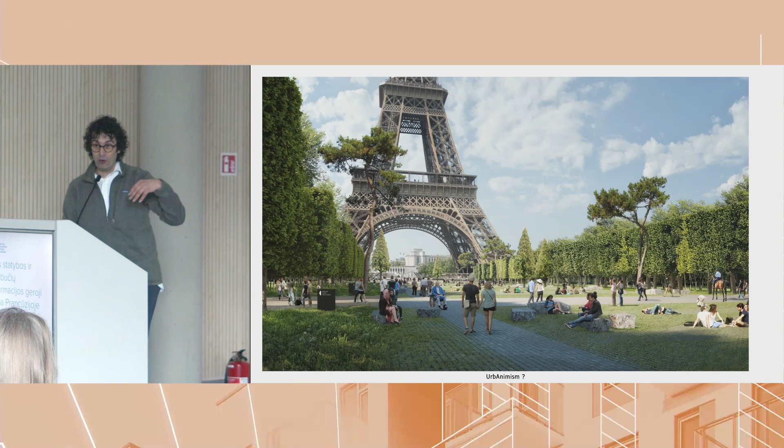We love planting trees. We tried in a competition for the surroundings of the Eiffel Tower, saying, okay, let's transform all this area into a huge forest with wolves, witches, and things like that, and we lost.

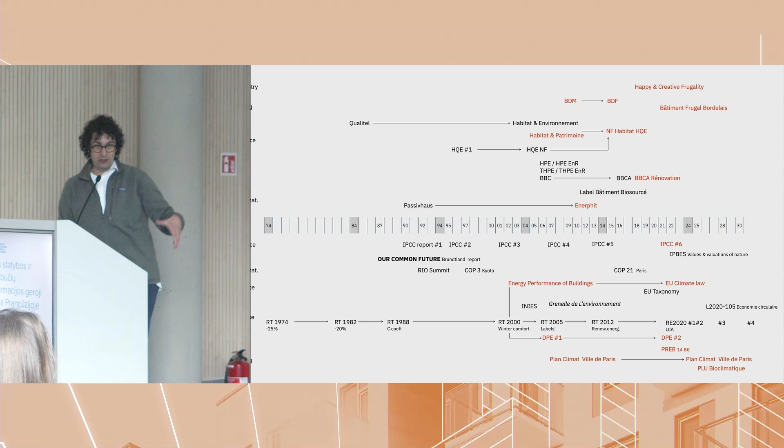Now this is the serious part about sustainability, because it all seems very intuitive and easy, but a lot of things are building up on an international, European, national level, even local level.

Basically, I've tried to summarize 50 years of the sustainability approach on buildings in France and Europe. On the bottom is all that is law, all the things that we have to do, whatever happens. On the top is all the things that are more holistic, that try to bring together different approaches to building. Because basically the law, you just have to apply it, otherwise you're outlaw.

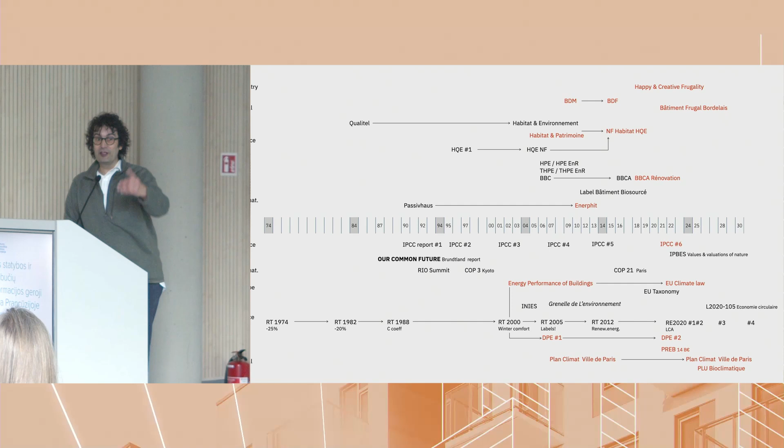The other approaches, which are referential labels and things like that, have this interesting thing that they are always evolving. They're always trying to catch up with new ideas. They have a faster cycle, but still they are always a bit complicated.

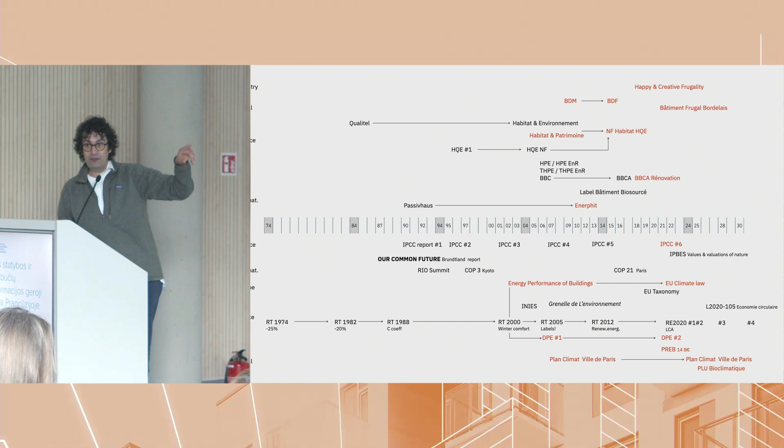What you see in red is all these laws and labels that have concerns regarding restoration of buildings. For a long time, you can see almost till like 20 years ago, it's really the moment when we start realizing that there is a huge issue about sustainability in renovation of existing buildings.

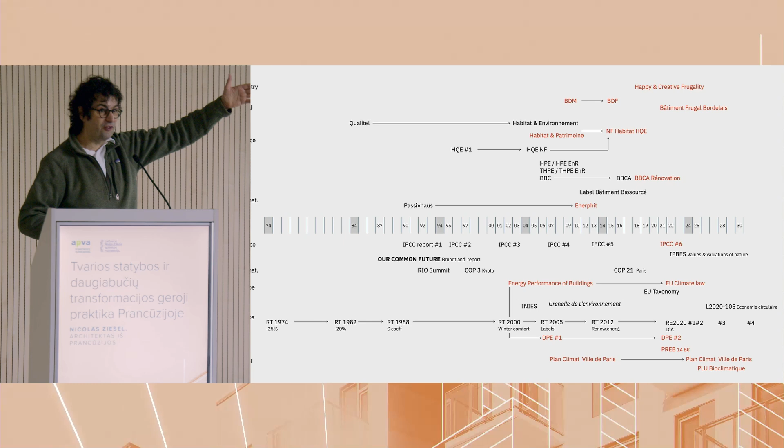I'm not going to detail everything in it, of course, lucky you. But still, it's very interesting to see all this map of things that are evolving, and to have this in mind, because sometimes as architects, people just say, okay, you're going to apply this new law, and you say, what the hell, we already have this one, we already have that, and we end up piling like 5 or 6 different systems together.

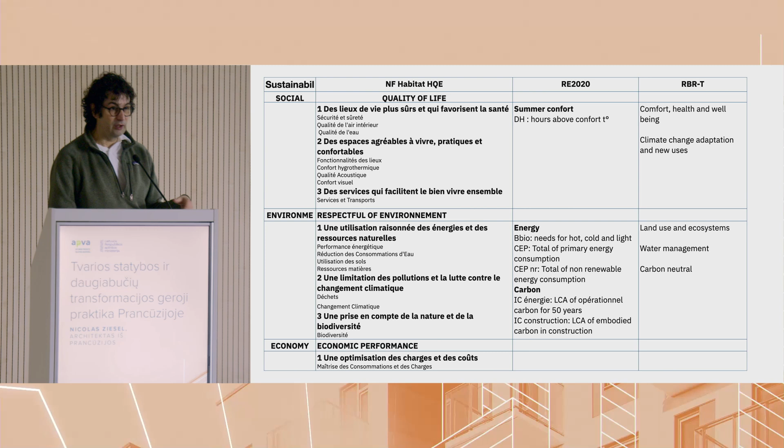Basically, it's super easy to understand, because everything goes back to the Brundtland report in 1987, which defined sustainability as being the intertwine between social, environment, and economy. And everything that you see, you can always break it down to these 3 aspects. So it's also an easy way to relate the different levels.

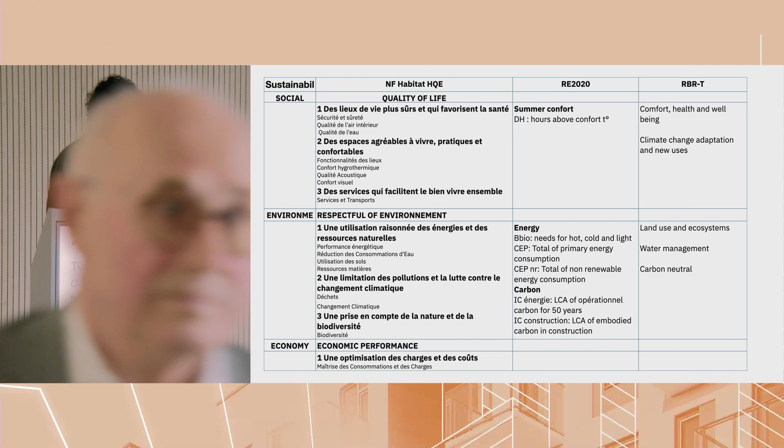The first column, NF Habitat HQE, is a holistic approach that is totally voluntary from owners and builders and things like that. Why do they do it? Because the law, as you can see on the right column, asks for less. Well, they do it because it's also a guarantee for future owners, regarding who make maybe a mortgage to the bank. If you respect this, you probably are going to have a much better housing than if you don't respect it. So this is sort of encouraged by finance in a way to do it.

And very easily it's broken into these three aspects. Then, since 2020, we have this new regulation in France on a construction code, building code that applies for the moment mainly to new buildings.

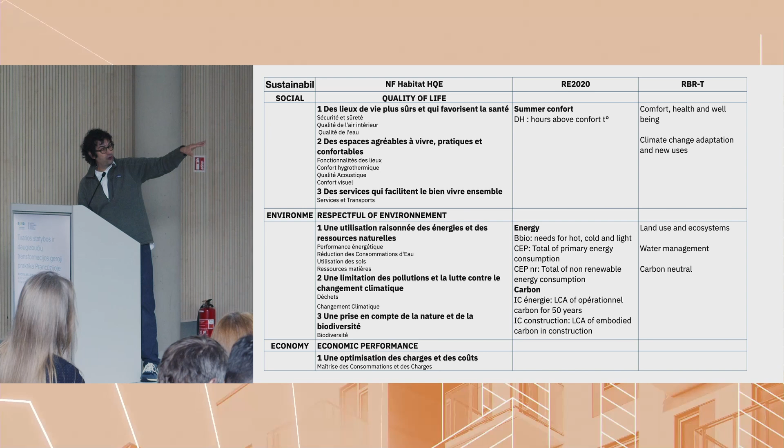But if you have an existing building and you just build like 10 more square meters, you have to apply it. The interesting thing is that usually all these rules talked only about energy and summer comfort, and now there's this carbon aspect that's really important. This is really a worldwide move, and I think Europe is pretty much forward in that.

Even though we all have national referentials, national ways of calculating the carbon footprint of materials and buildings, there is a sort of convergence of it. Just to give you an idea, in France we started listing the carbon footprint of materials like 20 years ago, and now I think 1/3 of the database worldwide comes from this French database.

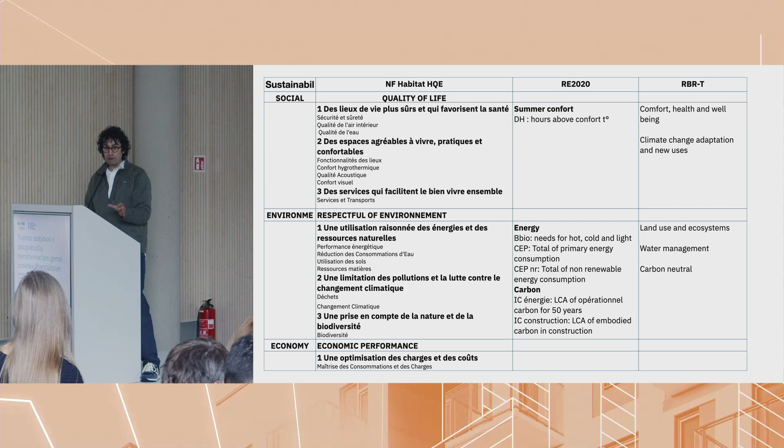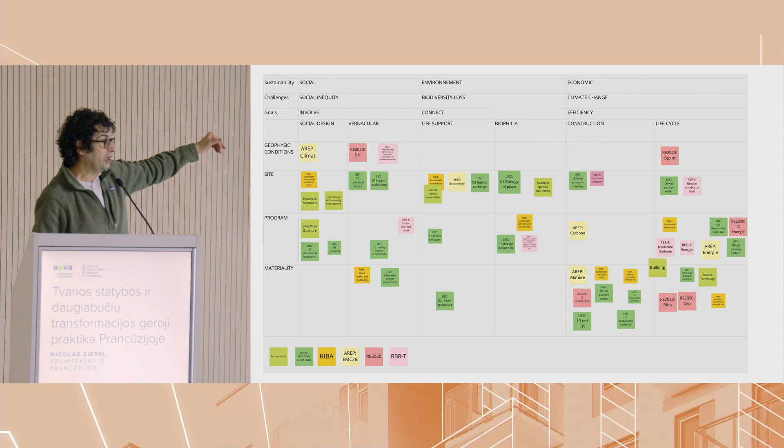It's not going to be so simple, as you're going to see. As an office, this is how we work, because trying to manage through all these things, we have made our own guide, which is to combine three aspects: social, environment, economic. Six sort of topics for a project regarding social design, life support, construction impact and life cycle impact, and how they apply at different levels of a project, from super large climate conditions to the materiality and sensitivity feeling of the buildings.

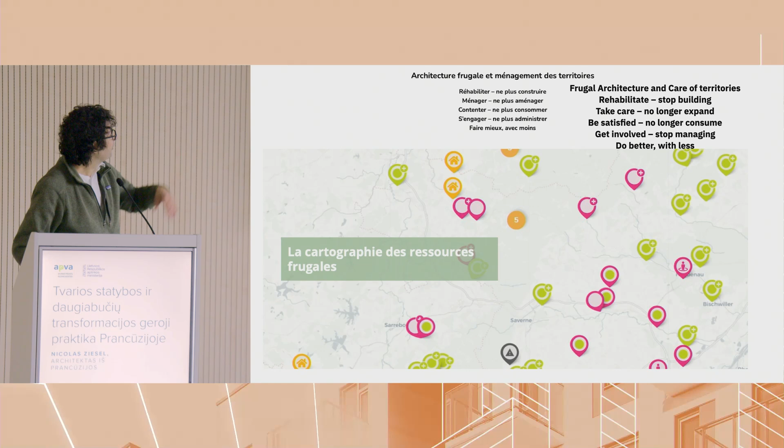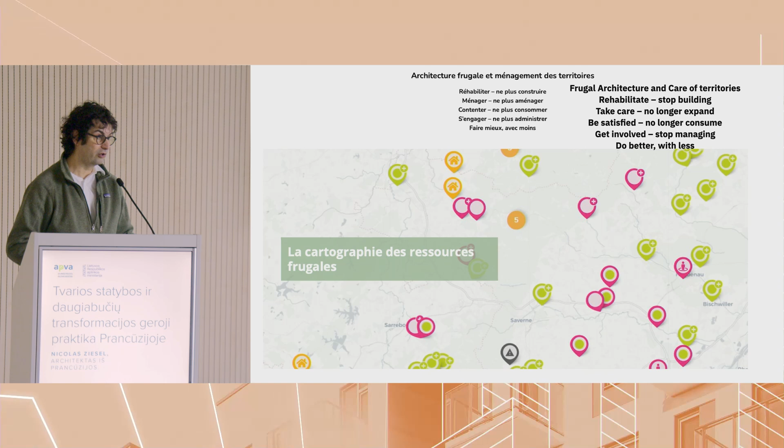Then there are people who are really fed up with all this complication, and who try to have super simple rules. There's this great initiative launched by French, Belgian, Spanish, Italian architects called frugal architecture. They have 4 or 5 sets of rules, each time in opposition to the business-as-usual way. It's a very interesting way of tackling things. It's also a network of people who exchange on practices, recipes you could say, and it's possible to launch a chapter here, nationally, citywide, or whatever.

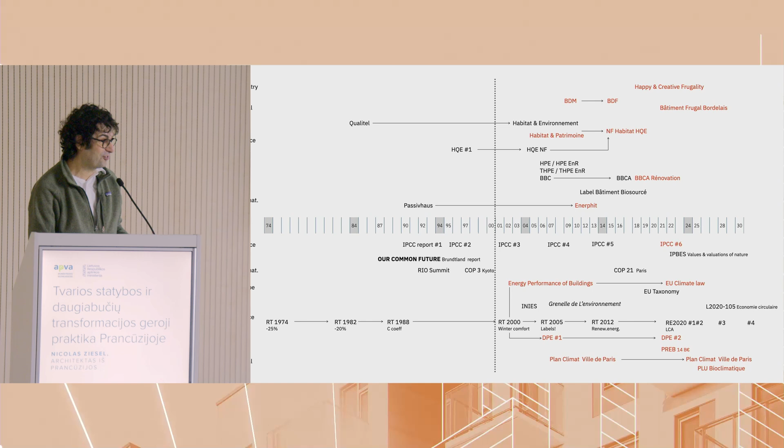Now I'm going to show a few projects, sort of a timeline. One of the first projects is the first project we made in wood. At the time, there wasn't much regulation and not much of a holistic approach. So basically it was a super small house, and you'd say, wow, a wood house, that's super ecologic, super sustainable.

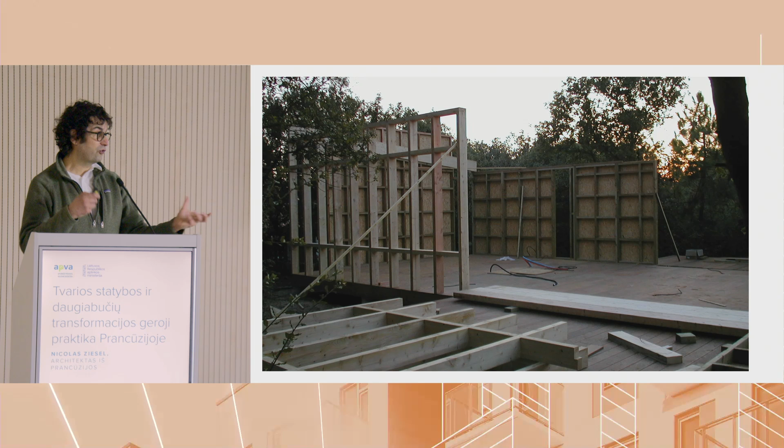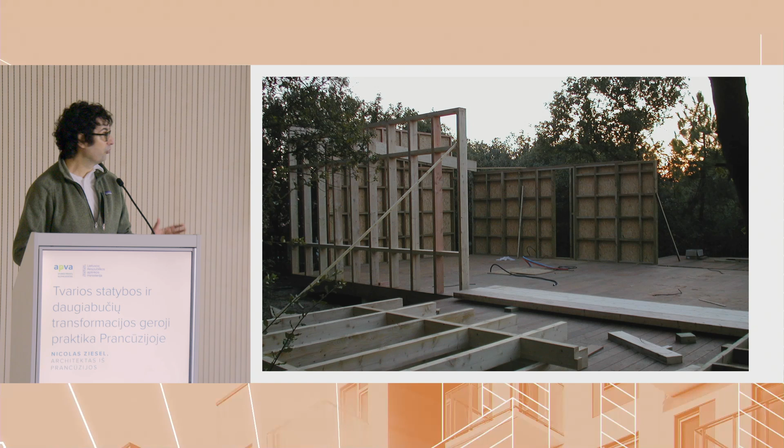A second project I'm going to talk about is a 100% wood structure in Paris, but it's also a project that was, let's say for us, the main retrofitting activity we had — working in the heritage areas of Paris. The difficulty is that since it's heritage, you have heritage architects who are always raising issues, which was actually a good thing for us on this project, because basically we were completely outlaw on the wood aspect. There was no code building on it, so we were really improvising, and there was no proof that what we were saying was real.

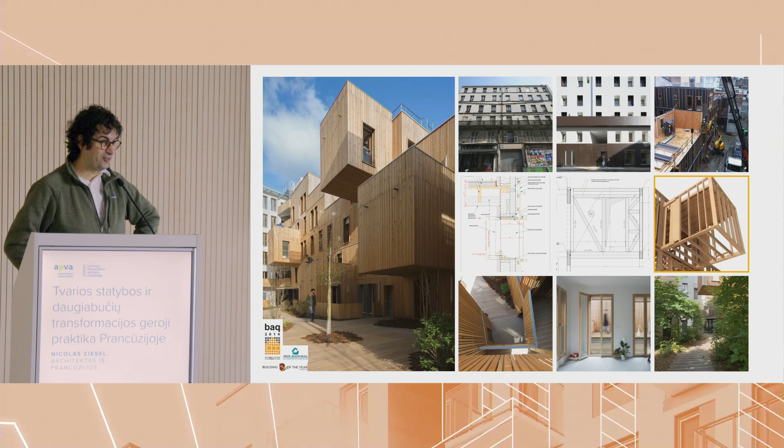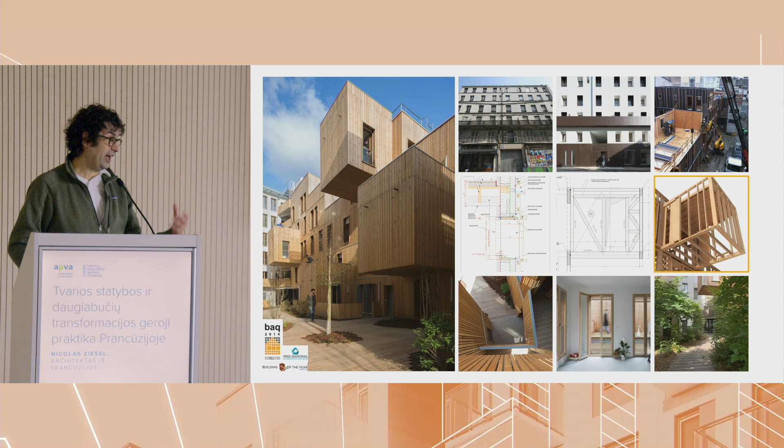This was really moving with this off-site production, because one of the interests is that since it's off-site, the building takes less time, and this applies also in renovation, so you have less trouble for all the people living in or around. In fact, the construction work was so silent that the neighbors complained, because there was only 1 day a week when there was noise, when they were delivering the panels. That was the 1 day when the street was blocked, but they couldn't understand it. If they had traditional construction work, they would have had a 7 days a week issue with noise and dust and things like that.

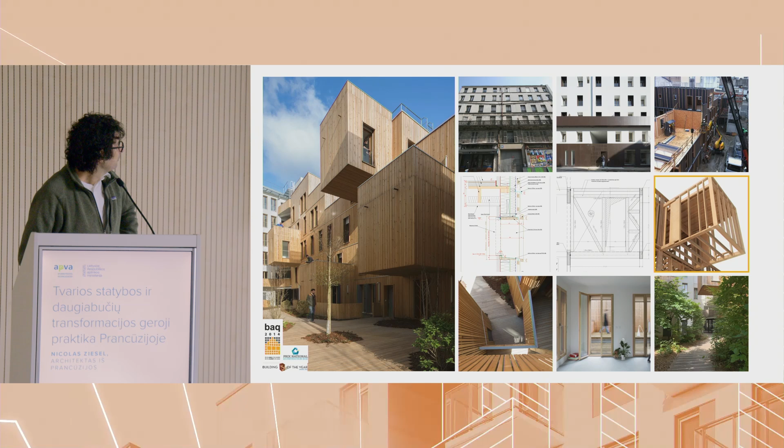Same exercise. So this one is 10 years old. How does it go? Not too bad, not too bad, because there are a lot of things that could be done better.

One of them is very clearly air tightness of the buildings. At the time, products existed, but we were completely out of cost. Passive house, which was really the state of the art, was completely out of cost in France in terms of material availability. So we could really do better.

And then there are also things that you realize. If you want to lower the carbon footprint of a building, don't build an underground parking. That's the first evidence. This is where the mass of carbon goes, because you have huge foundations, you have higher walls, and basically it's completely useless, unless maybe in 20 years we want to grow mushrooms in it.

And then there is the issue of energy. Here we are still on a system of gas energy, but collective energy, though still limited to these buildings. 42 meters from that was the arrival of an urban energy system provided by burning waste. But at the time, having these 42 meters was like 1 million euros more.

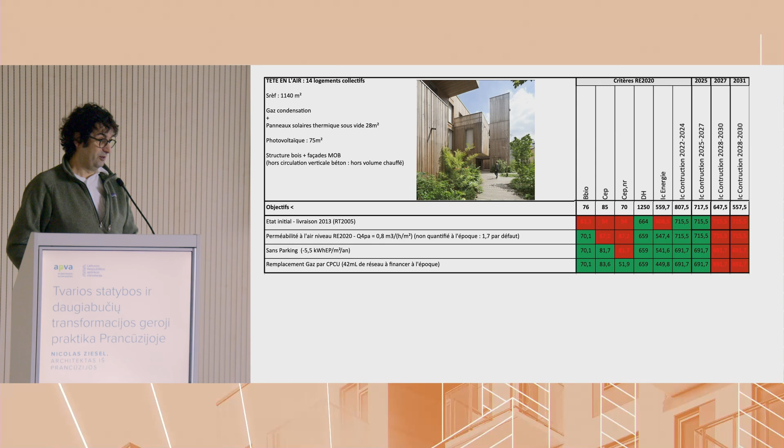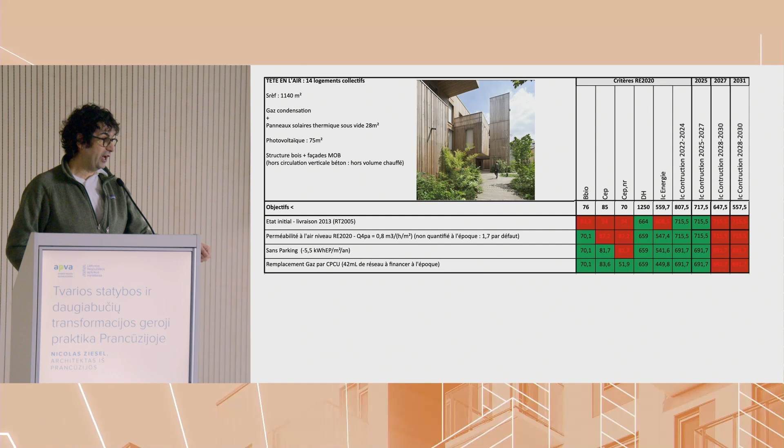What's interesting is that now Paris law has given the obligation for the people who run this facility to bring their energy, whatever the cost, everywhere. So basically this means that if we were doing it the same way now, we would be okay until 2027 under the actual French regulation. Not too bad.

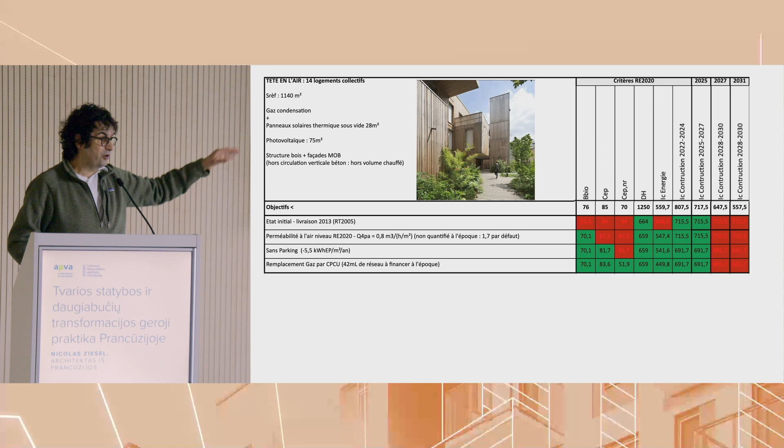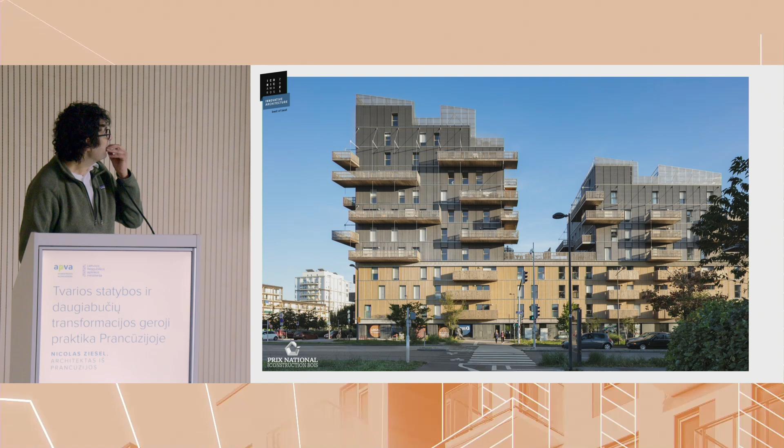Now we move a bit more and arrive at what was a pretty big challenge. This is, as you can see, 12 to 13 levels above ground, and it's entirely a wood structure. There is no concrete in the structure, and it's also a bit of a challenge because it's in Strasbourg, and it's a seismic area, which means that, doing the same thing, there were no references.

Except what's interesting here is why it was possible. It was possible also because the municipality of Strasbourg was very strongly involved. They had made a zone of 500 housing units that they called the biosourced area. They wanted that by having 500 units, there would be the opportunity for local builders to change the ways of building. There would be a market opening for biosourced materials, ranging from wood to insulation. And so they made this really strong decision, and then they were there all the time.

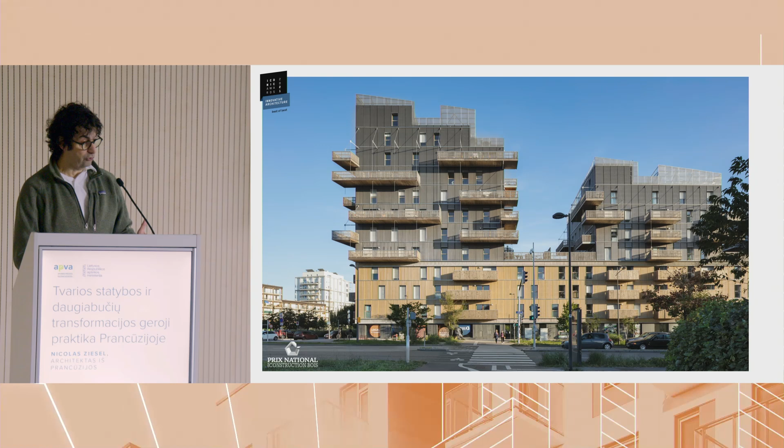So it took quite a long time to build. From the competition to delivery, it was something like 6 years, because in the meantime, all these 500 units were testing the limits of the technical building code in France. And so there were a lot of meetings, a lot of trials, but that was only possible because there was this public authority running the show.

Same thing, it's completely off-site, which means that to build these 150 units, there were 4 people during the structural part: 1 on the crane, 1 on the ground, 2 or 3 on the building that were just having the panels lifted, put on site, screwed, and that's it.

Then what's interesting also is that in all these industrialized systems, when you want to have the approval by engineers and controllers, they always ask strong questions. One of the questions we faced here is that there are earthquakes, and these industrialized systems have metal connectors. Nobody, except maybe a supercomputer at Google or whatever, is able to have a model of how these connectors react in case of an earthquake.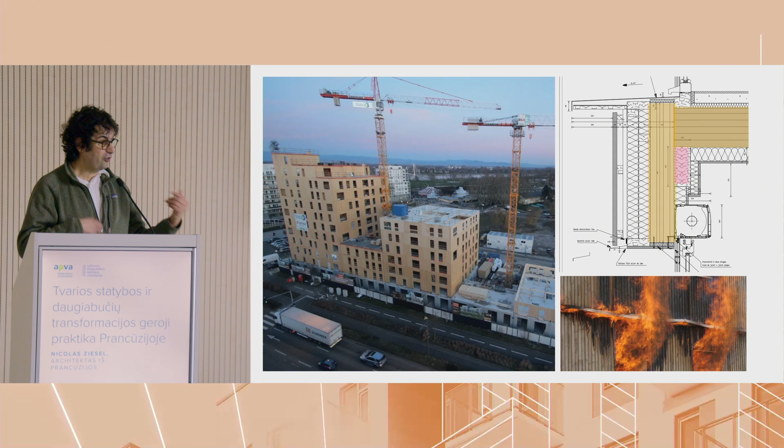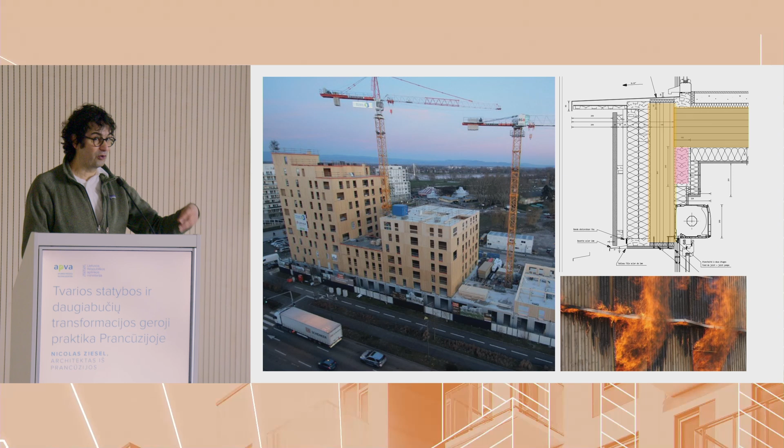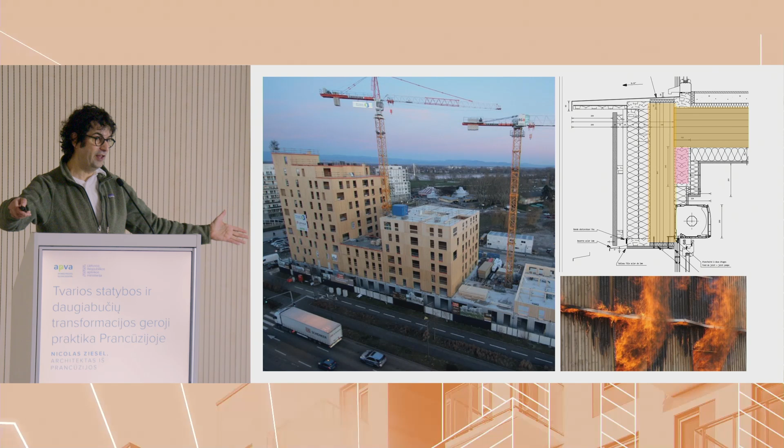So all this test and try real life thing is really something that is going to happen, I think, quite a lot and quite more faster, because it used to be things that started in the university, then there were tests and things like that. You had a sort of 5 to 10 year span between the start of the reflection and the moment it gets really on the market. Now we need to test things in maybe 1 or 2 years.

Now, when you look at the carbon inside here, this was thought 10 years ago, it was delivered a bit 6 years ago. And you see that we are already super good, except on the actual regulation, except on one thing, which is the carbon footprint of embodied components of the building. We are not at the final step, which is the 2031 step.

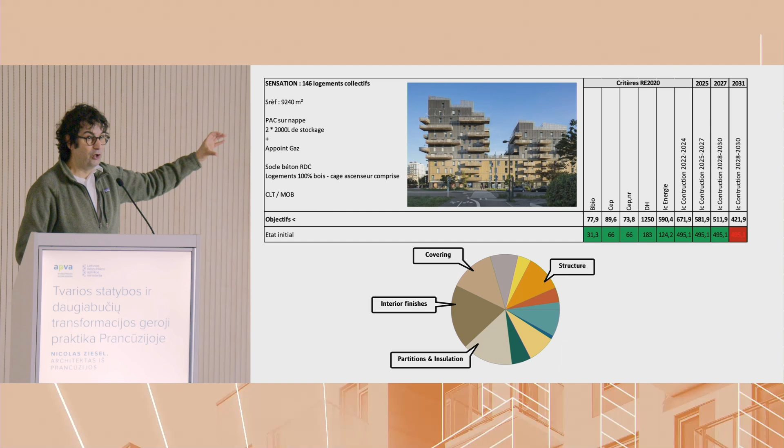So when you look at how this applies, you see that structure, well, we're not going to go really lower. And then you have 3 elements that really have a super strong carbon footprint. The thing is that these 3 elements are mainly industrial components, which means that we're not going to be really able to lower the carbon footprint of our buildings if we don't have the industrials working on it. And when I say industrials, that's really important, because industrial means investment.

When you change the line making a car, you know that it's going to cost billions. When you change the way that you make an electric plug, it's also going to cost a lot of money, because there's really design, industrial testing, and market work to do behind it.

So really the biggest challenge we have in the next 5 years is bringing all the industrials who are making progress, but that maybe don't realize the impact that every single simple element in a building has on its carbon footprint. And of course, when I say carbon footprint, it's a nice way of saying things, because when you say carbon footprint, it means you're pouring more carbon into the atmosphere and you are pursuing the climate change disaster.

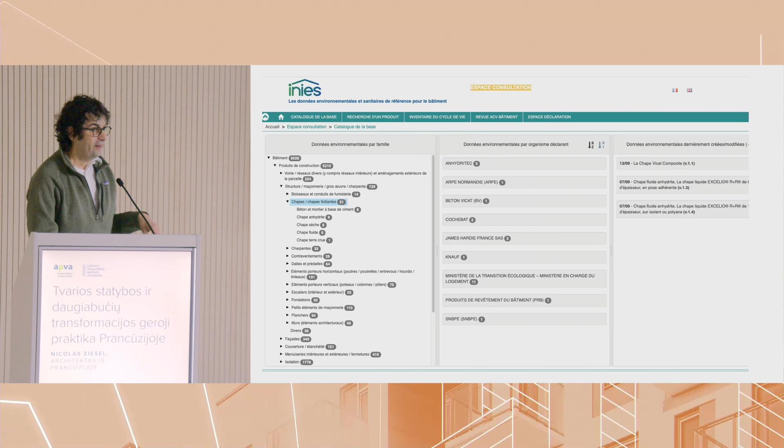I told about this sort of database of industrial materials. This is what it looks like. It's not very sexy, but you have a whole list of it. And what's interesting is that you have 3 levels.

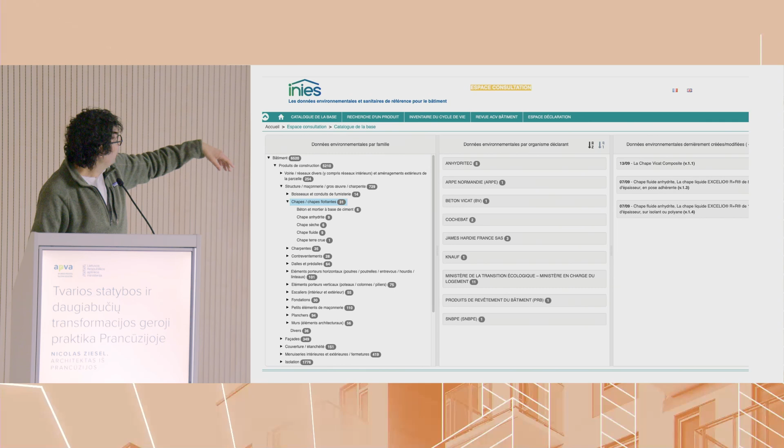And this is when it becomes a bit funny, because also this is not science. It's not Nobel Prize science. It's really things that are evolving that you have to take with a pinch of salt and be able to understand what's behind the numbers.

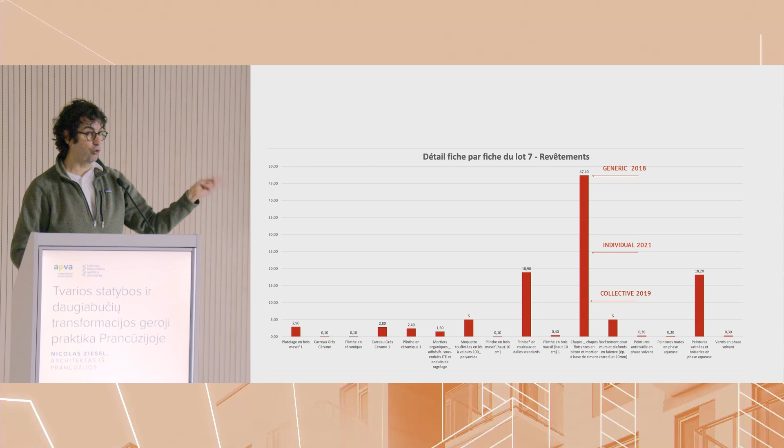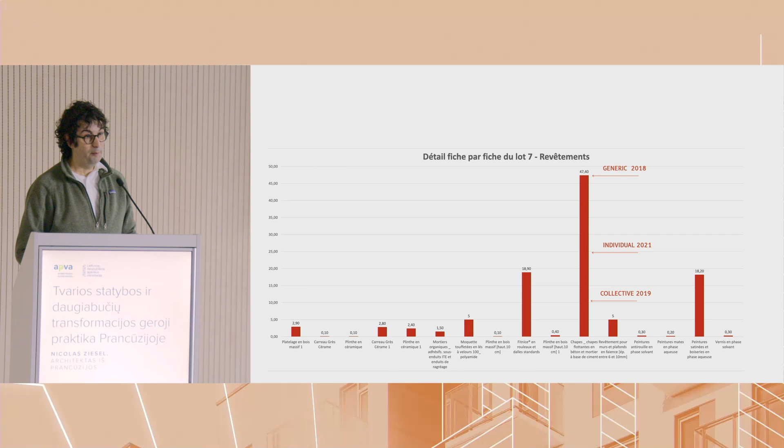Because, for instance, with this, you know, the floor. In Strasbourg, we had, because it's an area where you have super hot summers and super cold winters, devised this idea of having concrete slabs with water flowing inside, which is a great way, with hot or cold water, to bring winter and summer comfort. Basically, it works. We didn't have any bad returns on it in 5 or 6 years now.

But still, that's concrete, and it's very special concrete because it's under special conditions. And this is the high rising thing. But that's also because at the time, we only had the figure, which is generic 2018, the number, the carbon footprint of this material that is decided by the government because there is no other figure. So they sort of decided, okay, it's this level.

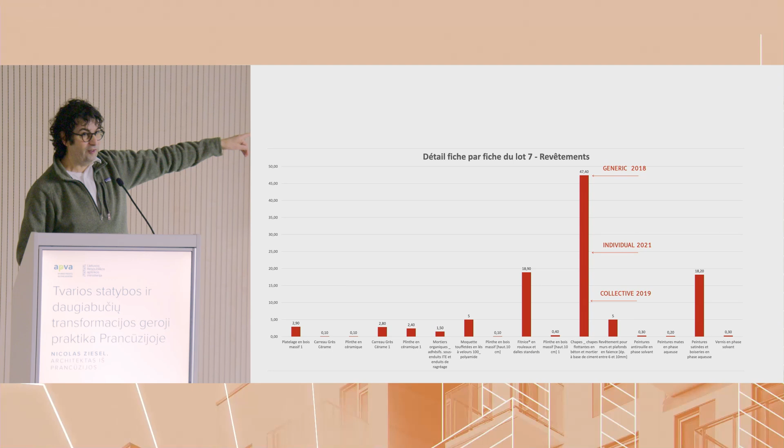Then you see that in 2019, all the industrials made their own calculations and they came with this number. The thing is that the guy who provided us the system made his own calculation on his system 2 years later, and then it rises a bit more. So you have to be cautious about it, but it's interesting to see also how things can evolve very fast.

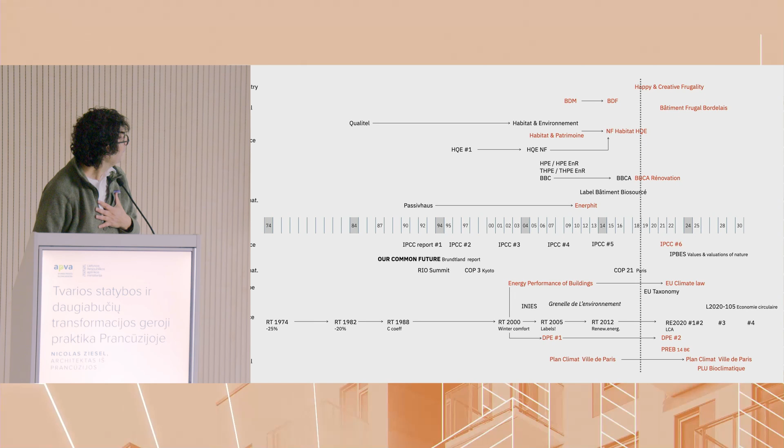It was a huge competition with private developers, contractors, and architects. We were a team of about 6 architects. Our part was mainly to have everybody talk together between some of our friend architects who had crazy design ideas, a contractor who wanted to make everything into concrete, and the government requirement to make sustainable buildings.

So it was really bringing everybody together and developing a building system that could fit all these requirements. The big challenge was also making a district built in wood, but you don't know that it's made in wood. It looks normal because, well, we're still in France. I mean, France is a country of stone builders. People think stone when they think house, and when they see wood, they think fire.

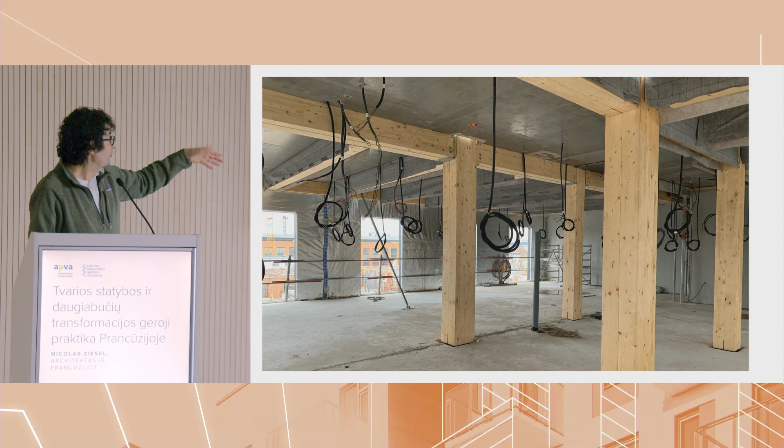So here is the system. It's very, very simple because you just have posts and beams. You have a wood load-bearing facade, and then you still have this concrete floor. Same thing, it's for winter and summer comfort, which is really a big issue. So possibly it's less good in terms of carbon embodied footprint, but it's going to be pretty good in terms of comfort and carbon operational footprint.

So there's always this balance between a lot of requirements that you have to weigh, and of course the cost. At the scale of the village, there was really an issue, because this was something that was really easy to do in France when you go to 4 or 5 levels. When you go above that, you're in unknown territory, and you have to have these certificates to be able to build.

The sheer volume of the Olympic Village, with something like 2,500 living units, was a huge opportunity to improve what you can do with a wood structure that can be self-standing. But it's exactly the same thing as if we were going to make it on panels on an existing building. It would be the same regulation.

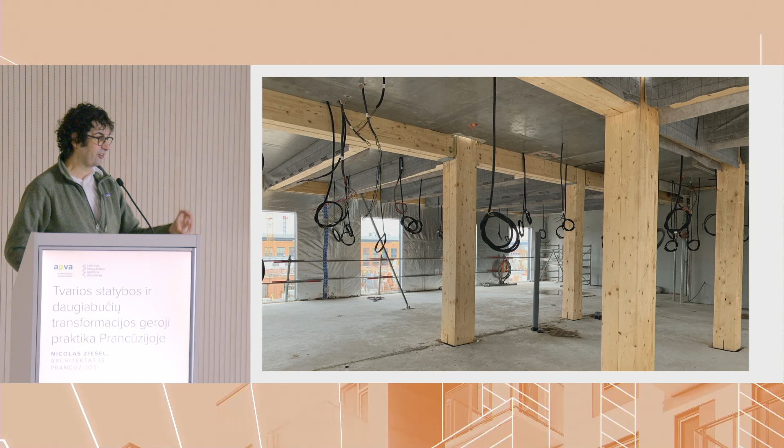So this is what's interesting: all the benefits made with this are going to be useful for what is the biggest challenge for us now, which is retrofitting existing buildings, because this has proven that it works, and the regulation now is working on both sides.

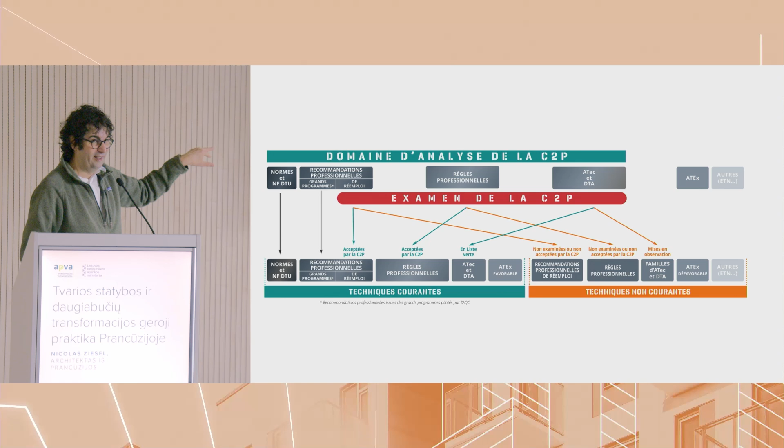But there's also a whole aspect of how you transform things inside. Interestingly, there's a new law that passed in France that, for the moment, only applies to public buildings, but it's going to apply to private ones soon, which is that you have to incorporate 20-25% of existing recycled, upcycled, reused building materials in the interiors of new or renovated buildings.

So this is the sort of thing we tested by making this big food court where we made all the furniture ourselves. When we started showing this to social housing offices who have this real issue of renovating all their housing, they said, wow, would you like to make all the new kitchens that we're going to have to redo? Because this would be a great way for us to comply with the law.

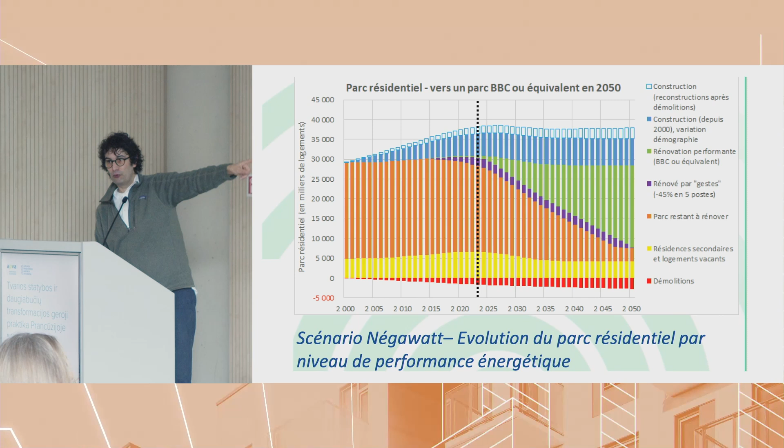And the thing is that we are not really on track to do it, because this is pretty much a counterexample. So this is the situation we had. You have these social housing units that are in the center of this small town in France.

The whole idea was that because the office who runs it and the city didn't agree on what to do, they invited four teams of architects and landscapers combined to spend three days on site to come up with ideas. What can we do in the next 30 years with this place?

So we were having a sort of office in an apartment that was free. We were sleeping in the apartment. We came a bit late, the beds were gone.

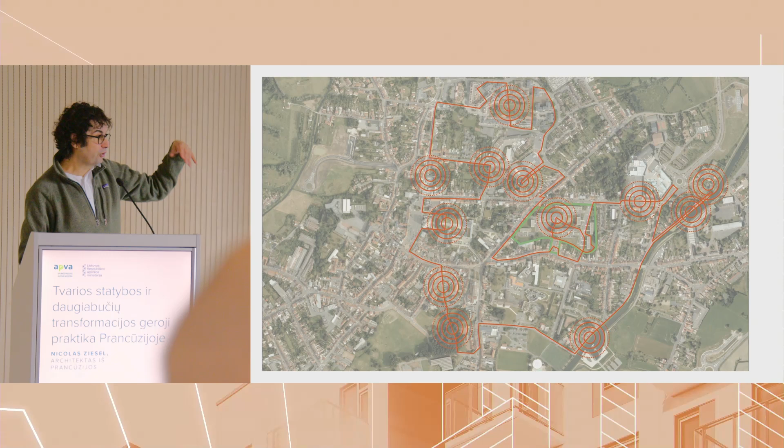Our team started just going around the city, looking at what's happening in all these places and noting things. We noted two things. One thing was that people use their cars mainly as storage, a mobile storage.

The other thing was that, except for this area, all the other parts of the city are private gardens, sometimes very small, very narrow, but they are gardens. This is something that is lacking here.

So being there also gave this great possibility to meet people. We met this guy and we talked about this. It's funny, people seem to be using storage in their car.

He said, yeah, that's because we can't use the storage we have in the basement. I said, oh yeah, why not? He said, well, that's pretty easy, because when they built this, it used to be a swamp. I know it because my wife went ice skating in the winter in this area. So it was a swamp. When they built it, they put some trees that were draining the water. When the trees grew big, because they were making shade and people complained, they cut the trees. So now the swamp is going into the building.

So just by being there three days, there was an issue that everybody thought was super dramatic, impossible to understand. And you realize it's just because we don't have the knowledge. So it's really important, I think, to spend time on the sites.

Then when you look at existing buildings, they're not so badly done, except that, of course, they are a bit small for today's use, not adapted to today's families. You also realize there's a lot of acoustic problems between the apartments. Everybody thinks it's because of the structure, but when you sleep there one night in an empty apartment, you realize it's mainly from all the ducts, the things going through with all the water pipes and things like that. It's really this.

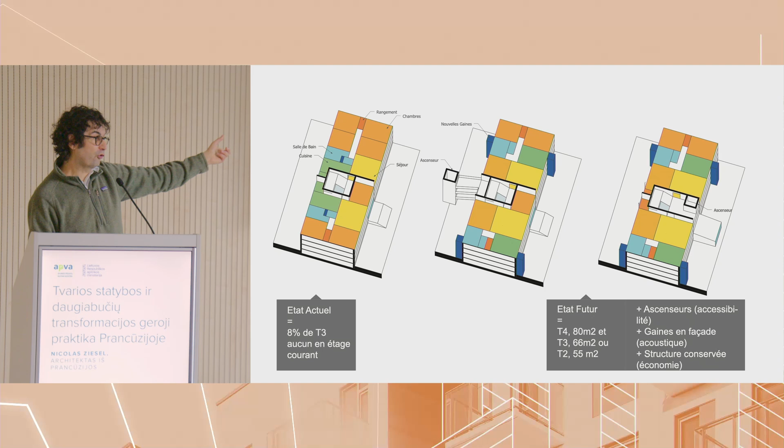So the whole idea was, let's put all these things that are inside on the outside. This is the blue thing. This is also going to make it easier to change the interior configurations.

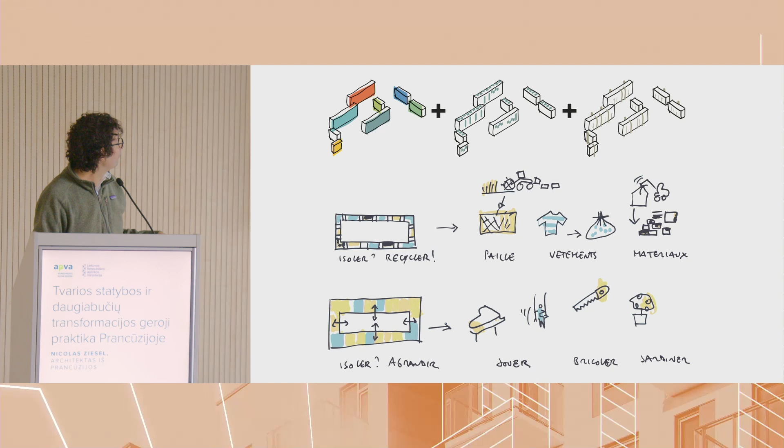Of course, bring some elevators because there's a lot of old people. And then bring better insulation by recycling, and also by thinking about, if you bring an extra layer outside of the building, is it just going to be a solid insulation layer?

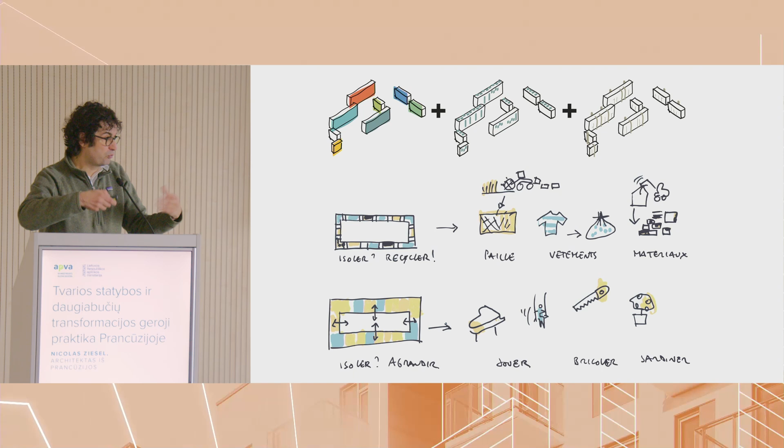Maybe it's also an opportunity to bring something else. You can bring balconies, because there were no balconies. You can bring outdoor, semi-outdoor, indoor spaces, winter gardens, and things like that. You can, of course, have energy coming from the roofs.

Maybe it's interesting at some points to take away one apartment to sort of lighten the structure a bit and bring light inside. You can reuse the water to grow fish and things like that.

And so this was the proposal we made. So, of course, taking all the cars out of it. Having these sort of private gardens at the bottom, 10 minutes, it's okay.

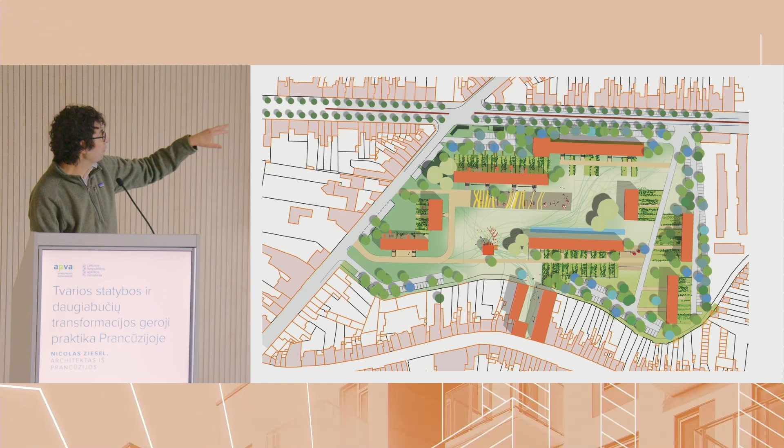Having these private gardens and transforming what was parking into this big plaza, which is going to be the place for the kids to play, local market, and things like that.

And of course, if you want to do something like that, you don't think about making a project the usual way—designing it and building it step by step—but having an on-site office to have this interaction with the people, because there's also going to be people who live there. They're going to live there while we redo their apartment and things like that.

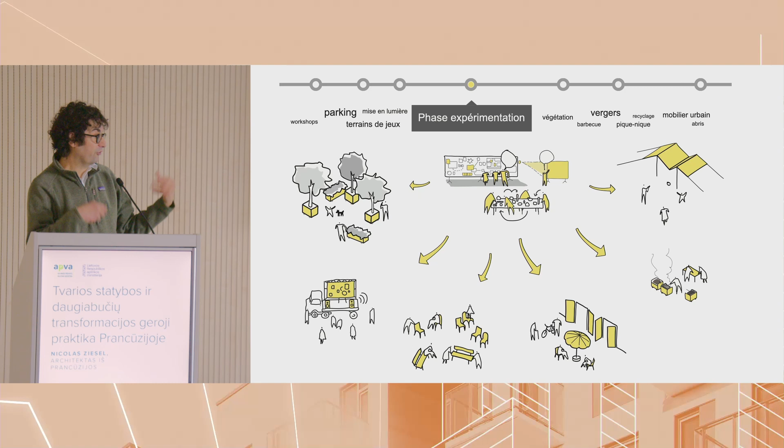So there's a sort of necessity of a presence, a necessity also to raise competencies in the workers who are going to be there. So there's a lot of good reasons to be on site and to have more participation at all levels. And this is something that as architects, I think we must do a bit more.

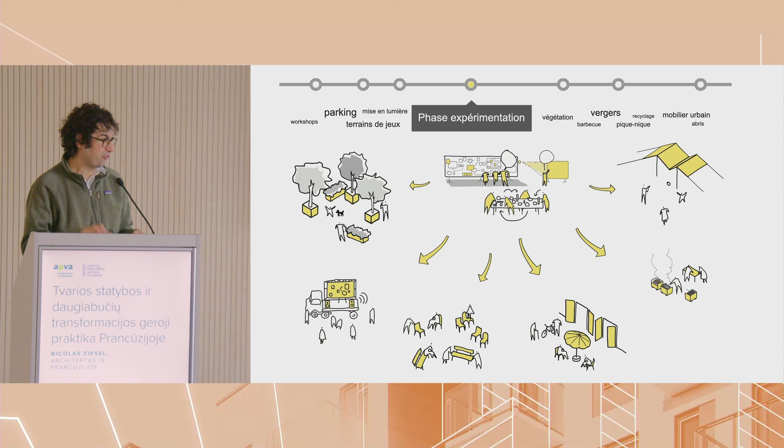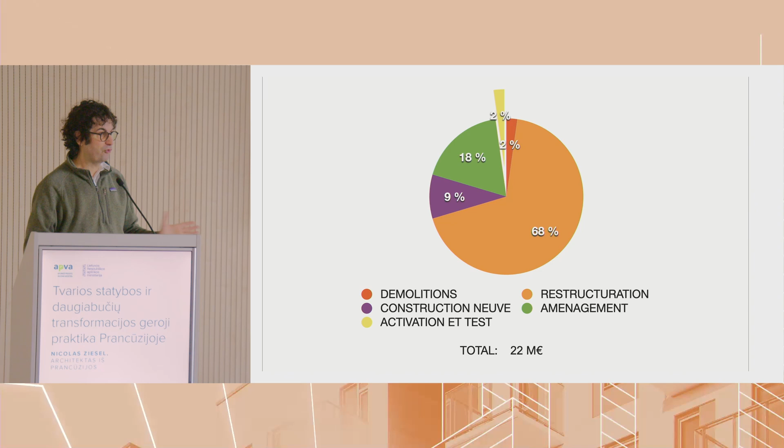And the whole point was also proving that it doesn't cost so much—that having, for a 10-year span, a whole team on site all the time doing this participatory process, innovation and things like that, was going to cost about 2% of the budget, which is really absolutely nothing.

I mean, there's a lot of things being done to make concrete greener, but time is really catching up. And the more you go about it, the less it's going to happen, because all these systems that are going to maybe reduce the carbon footprint of concrete are getting harder to reach, and they're not getting more than 15–20% improvement.

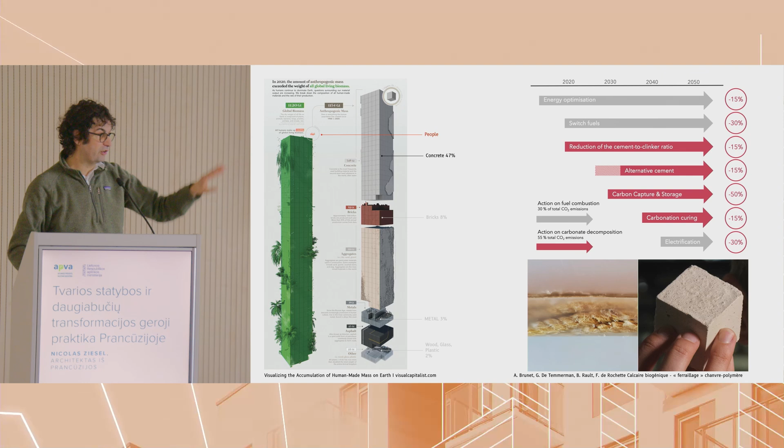So still, it's going to be a super emitting industry at a world scale, because of course in Europe we're going to be able to use low carbon concrete. Great, but in the global south, it's not going to be affordable anytime soon.

So then, of course, forests. Building with wood, super good. The thing is we also have to be cautious about the use of wood in a way, because yes, there are 3,000 billion trees alive. Each of us is the owner or friend of 400 trees, to give you an idea, in the world.

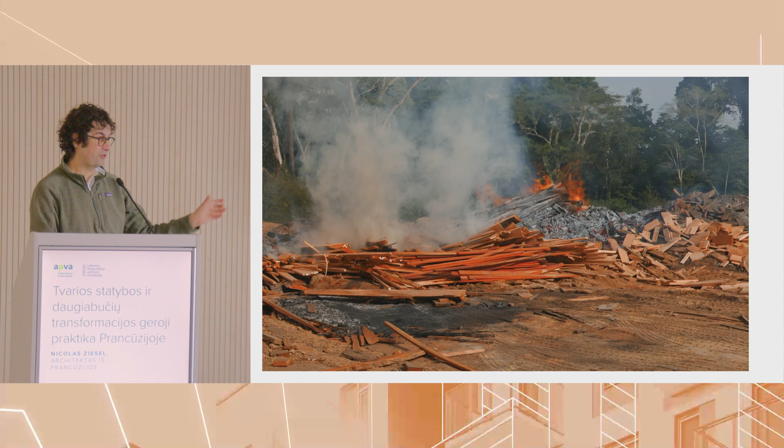This is in Africa. In Gabon, it's interesting—Gabon has the same population as Lithuania. It's also a forest country, but they export most of their production. They don't transform it on site.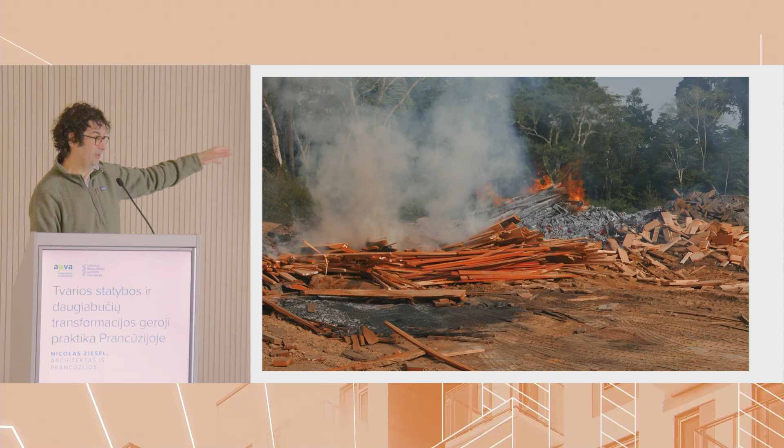But in the forest, you can see the whole process is super wasteful. They are burning the whole program of social housing every year in the forest. They are burning one house a day in one cutting facility.

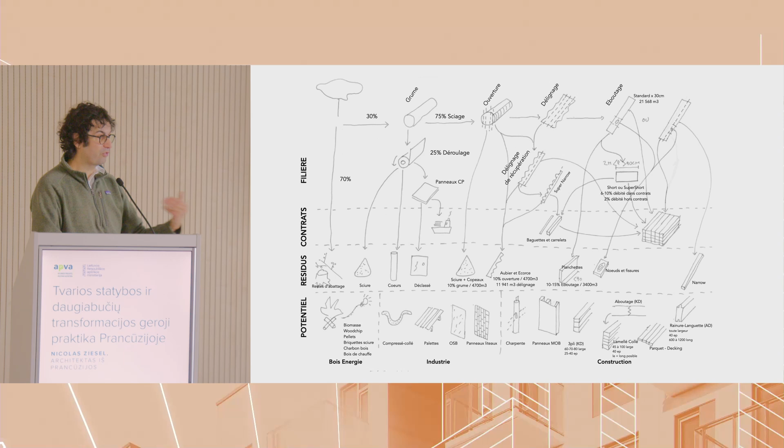When you realize it, you realize that from one tree, only about 30% ends up in real materials, because there is waste all along the line. So it's really interesting to think in terms like that: what can we do with everything that is wasted at each step?

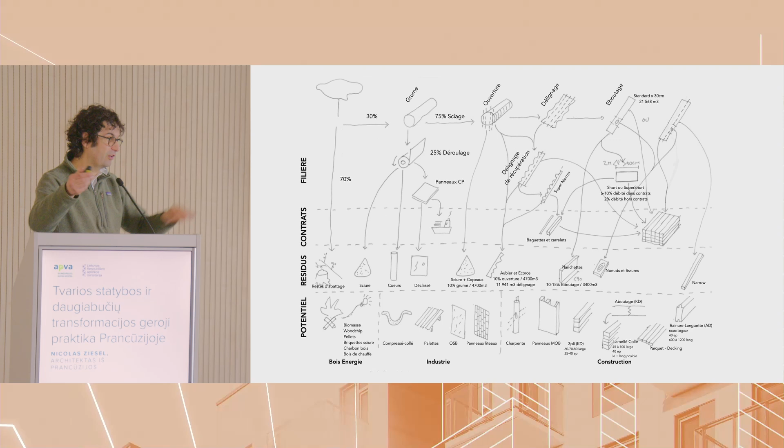We are in the process of working with these people, trying to find a way between people in the city and the forest to start these new industries. You can also think about using elements of wood that are considered waste, like all these embranchments, but these are of course the places where the wood is the most strong, so you can use them as junctions. MIT has started this study where they use them, and they have this parametric design.

So this could be completely off-site, this could be completely industrialized, and still this could be completely personal, because each of these is one living being.

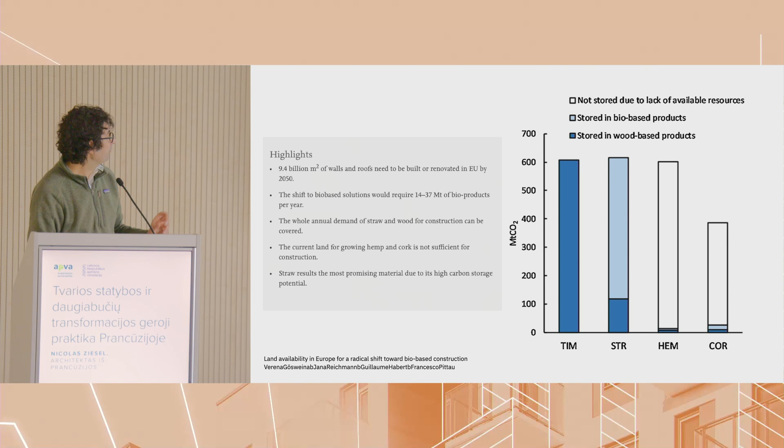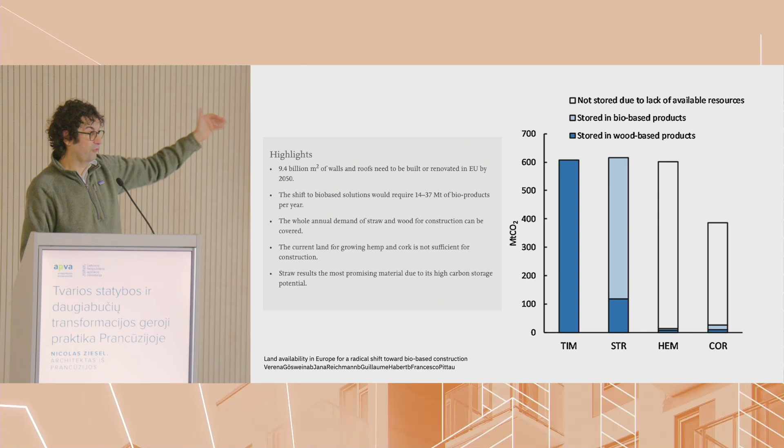At the European level, there has been this study on the radical shift toward bio-based construction. Of course, timber is number one. Number two to be used is straw, which is also a super available material, more for insulation. Then you have two materials that are a bit trendy right now, which are hemp and cork. But you realize they are not able to bring us the volume we need for the transformation ahead of us - hemp, because basically it's going to be used to make clothes, and cork, because it's a really limited resource. So these are a few examples of things happening around these materials.

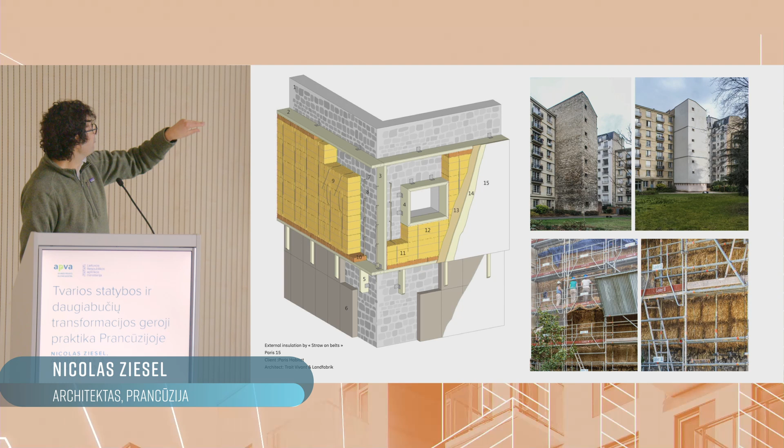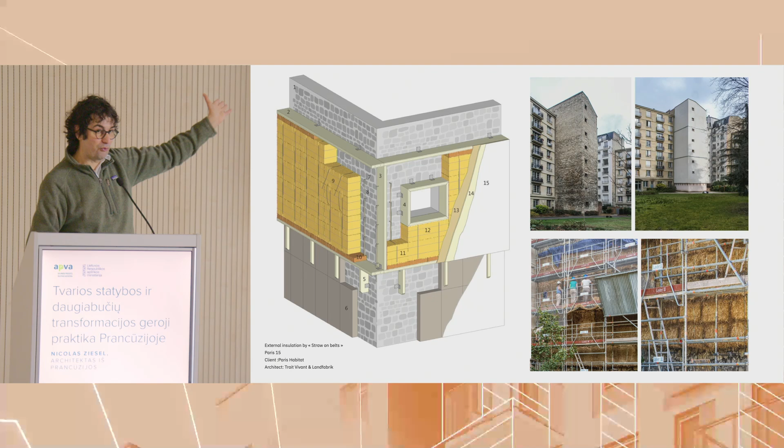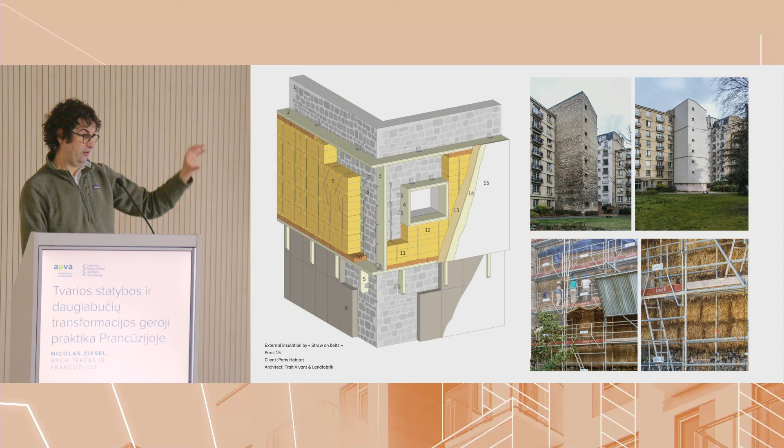One is with straw. It's in Paris, a social housing unit, and they have this straw-on-belts way of building that has been invented, which is very low tech - you have wood planks every level, you put the straw on it, then belts to tighten it, and a lime plaster finish. It makes for super good insulation on an existing structure, on condition that the structure is able to take the weight of the straw, because to have good insulation in straw you need quite a volume, which is quite a weight.

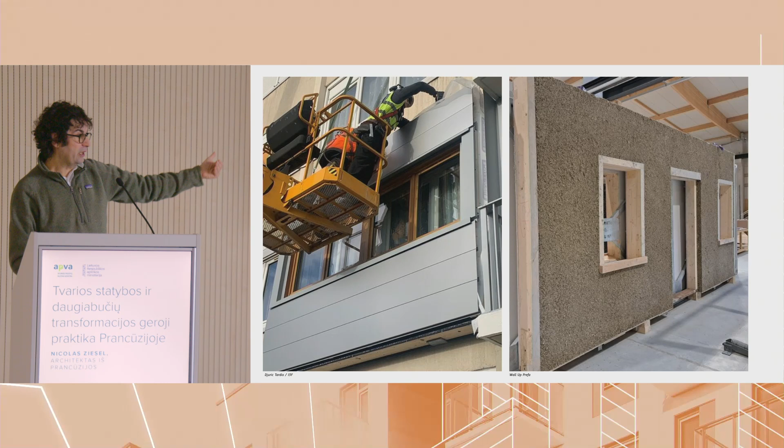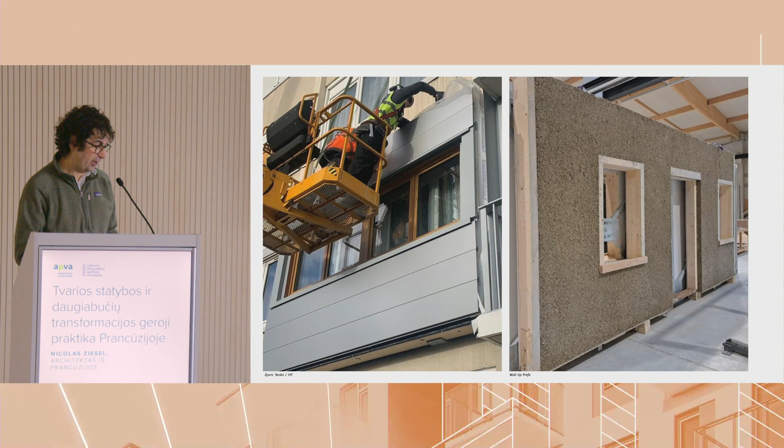The other option is to have more things that are also prefabricated, and this one is made with hempcrete, which can also be applied on existing facades, then you just have a lime plaster finish. So it's a different type of process, but both are off-site systems that need small factories.

And I came across this - Americans, of course, are also thinking about it. This is the system being developed, which is an all-in-one system. Basically it looks like a bit of a big promise that's not going to work, because when you realize you are going to make all these plumbing fixings everywhere, it's not going to be super efficient.

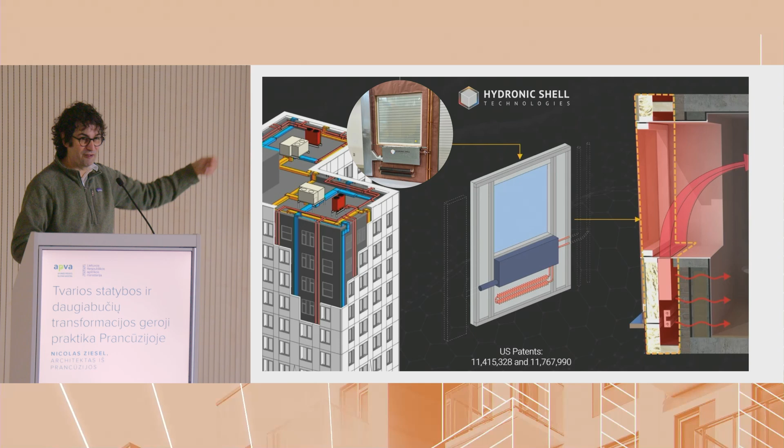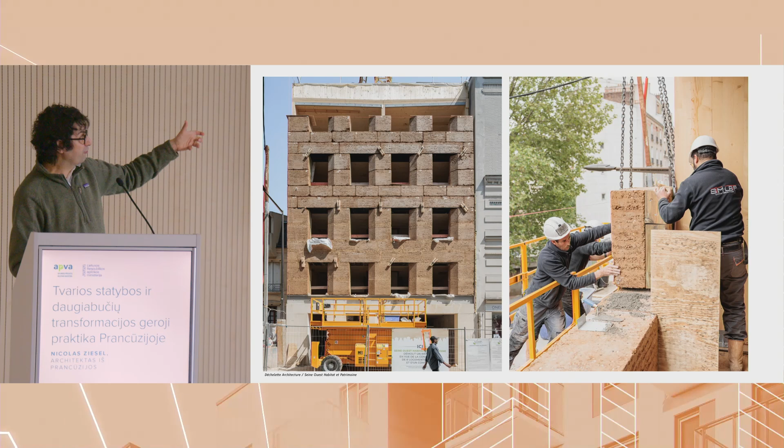One last thing that could be used is earth - super abundant, we have a lot everywhere. This is an example of off-site earth use, with blocks of rammed earth made in a factory, piled one upon another in front of a facade. Here it's not an existing facade, but it could probably be used in front of an existing facade to bring inertia that could provide humidity control and good winter and summer comfort.